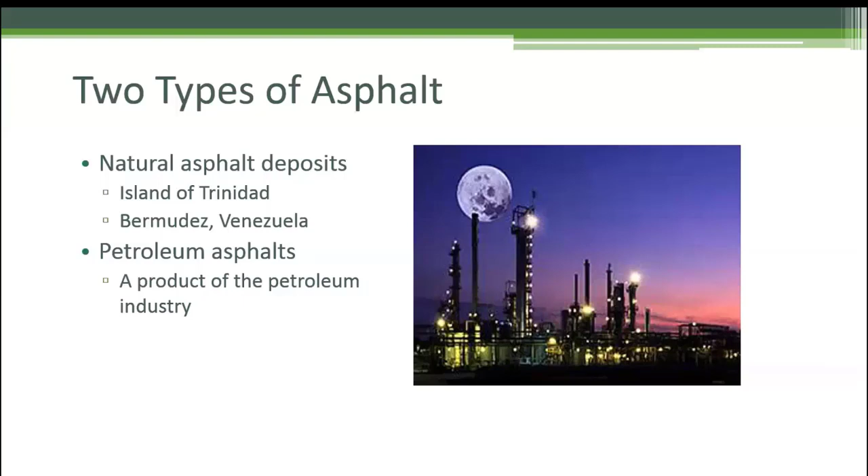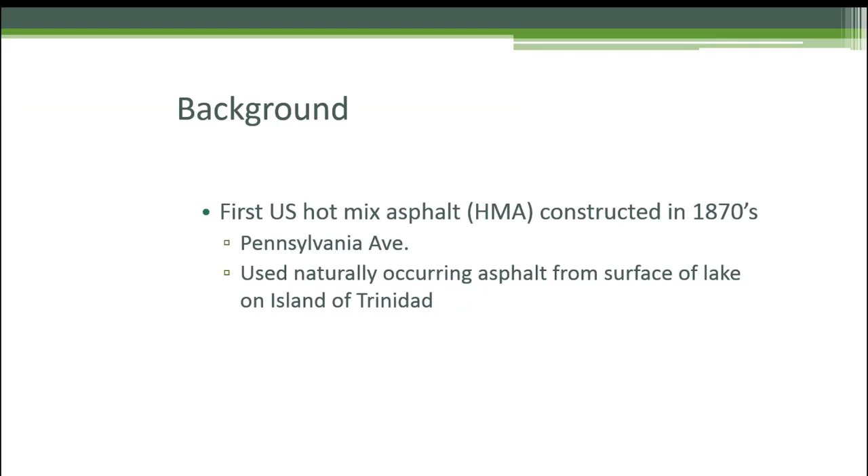As I mentioned, the first hot mix asphalts were constructed in the 1870s. Actually, Pennsylvania Avenue between the Capitol Building and the White House was one of the first paved roads, and they used these natural asphalts. This is in Trinidad.

This is a lake of asphalt, basically. I don't think you want to go walleye fishing there, but this is very high quality asphalt, obviously, for pretty low viscosity, low resistance, so easy to pump, and very accessible.

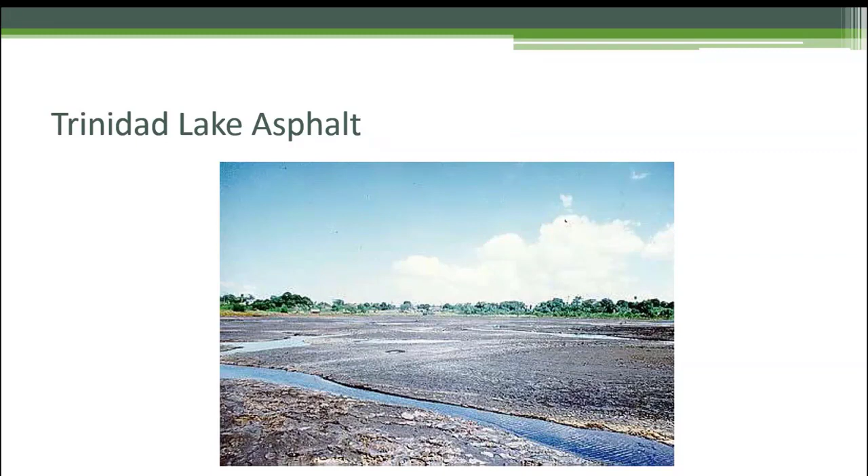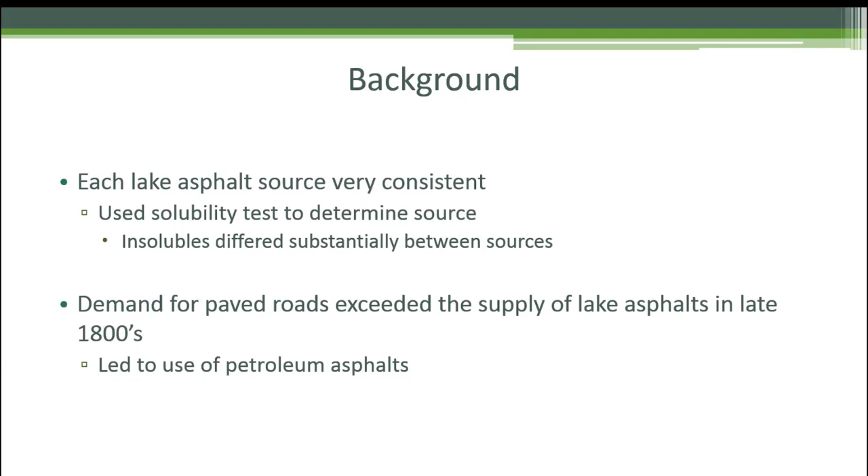Obviously, as the demand for roads increased, particularly through the late 1800s and the development of the automobile, primarily, the need for additional asphalt to build new roads increased dramatically. So we get into petroleum asphalts, and again, we're talking about refined crude oil, asphalt coming from the refined crude oil process.

And in general, the gases that come off the top, which would be methane, ethane, propane, those are easily collected. It doesn't take any temperature really to do that.

And they're collected and cleaned and stored and pumped out. And then next lower on the tower is the light distillates, which are typically your gasolines, kerosenes, and diesel fuels.

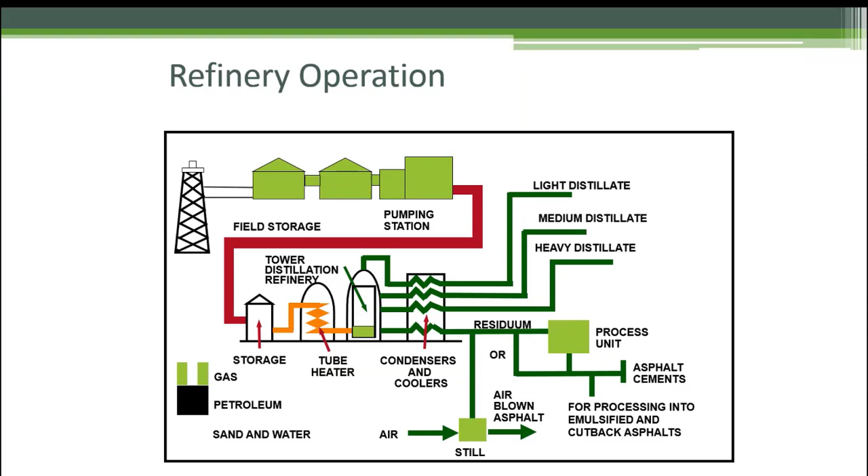So this is just the classic breakdown. This is actually in that black book I mentioned, the Hot Mix Asphalt Paving Handbook. It's also in MS-22, which is the Asphalt Institute reference material. It's just the distillation chart.

As you keep adding temperature to the crude oil, the first thing right off the bat are the gases, meaning the methane, ethane, propane, and so forth. Then the next thing as you're breaking it off, the light end product at lower breaking temperatures, are the gasolines—the naphthas, as it's called in the refining industry, because you refine the naphtha into gasoline, cleaning it up and adding additives to increase the octane. And then the next thing off is kerosene or jet fuel and diesel, and then gas oils or the fuel oils. And then the last thing left in the bottom of the drum is the asphalt residual, or the asphalt.

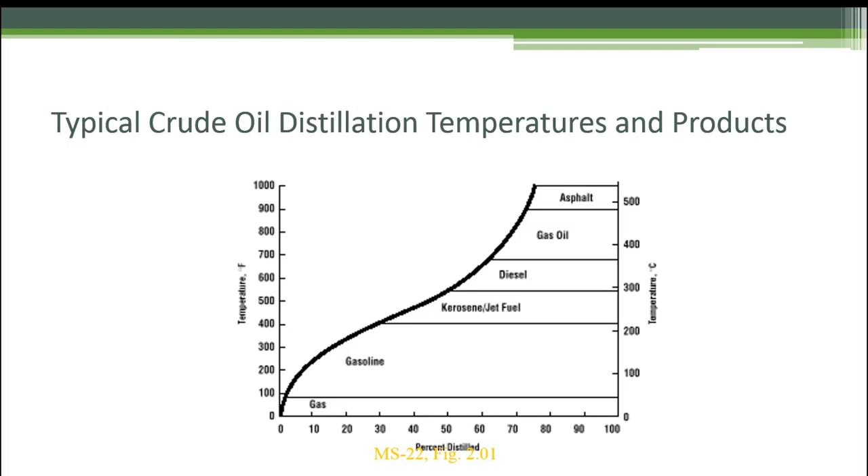Couple things to remember: asphalt's got some really unique properties. It's kind of interesting that the two products seen the most, the most basic ones, are probably the most complicated. One of those is water—water is one of the few products that expands when it freezes.

Asphalt's really interesting too, because it's actually a thermoplastic viscous material. In clean terms, at higher temperatures—70 degrees Fahrenheit going up to 200 degrees centigrade—it becomes a liquid. But as it cools off, it's a solid. So we call it a thermoplastic material because as it is heated, it becomes less viscous, meaning it flows a lot more easily, more like water. And as it cools off, it becomes a solid, semi-solid. It's an important thing to remember, both from the standpoint of processing and mixing, but even when compacting asphalt pavements, that property comes into play.

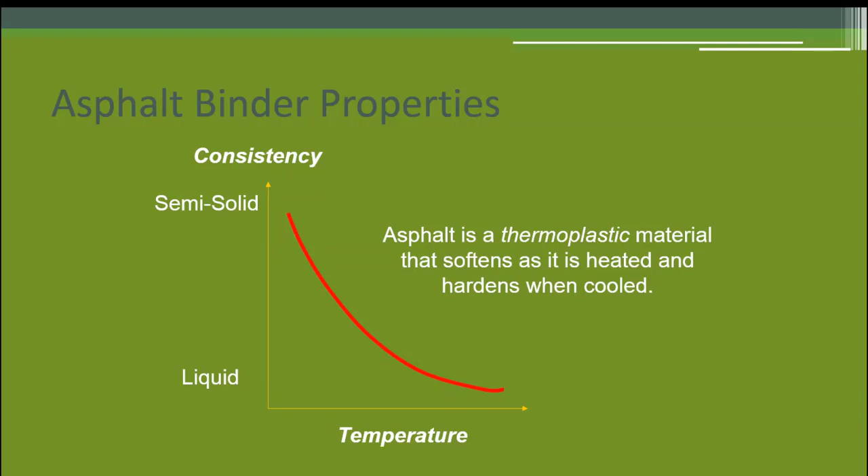The three basic delivery methods for asphalt itself are sometimes called neat asphalt, which is unmodified asphalt—straight from the refinery. It might be blended, but there's no other modifier put in. Or modified asphalt, where you put some type of modifier, whether it's SBR, SBS, styrene butadiene type products, polymer type products, or latex type products blended in with the asphalt. But those are basically the paving grade.

The other two methods of delivering asphalt in construction are cutback asphalts and emulsified asphalts, and we'll talk about that. The basic reason goes back to that thermoplastic property. Back in the 1920s, there weren't hot plants behind every tree across the Dakotas. So how did you pave a road? You had no way to heat up a paving grade asphalt to get the viscosity down so you could mix it with aggregate and get it hauled and placed. So you had to use another method to reduce that viscosity, and that's essentially what generated numbers 2 and 3 that we're going to talk about.

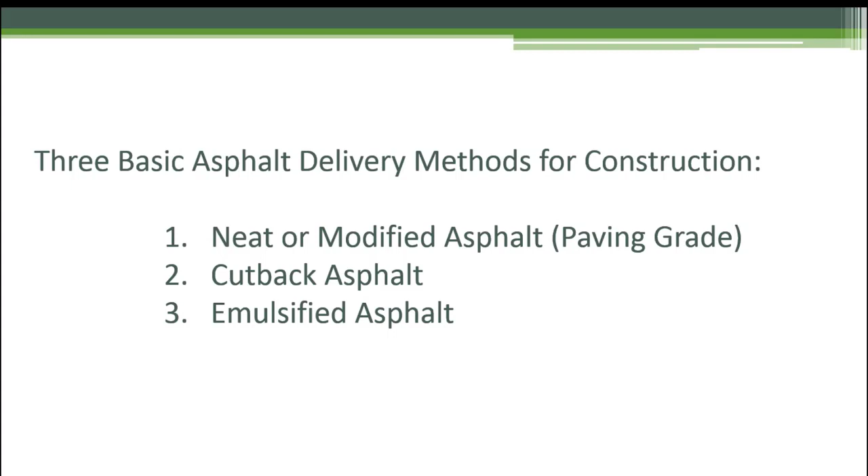Before we get into a lot of detail on that, I wanted to talk about the specifications. From the late 1800s on, you basically specified asphalt. You need some type of specification—get what you ask for, get what you measure. It was called penetration grading, sometimes shortened to pen graded.

It was a simple test. You essentially had this tin of asphalt at room temperature in a cup, and you put a weighted needle on it, and in 5 seconds determined how far that needle penetrated into the asphalt sample. So the number you get in penetration grading is actually a distance.

What's kind of interesting about this—because it's one of the older tests in AASHTO and ASTM—is why room temperature for penetration grading of asphalt? Well, you could test it any place across the United States. If you were in the middle of the Dakotas or middle of Wyoming and didn't have an oven to heat it up to a certain specified temperature, and even if you did, you didn't have a way of measuring that temperature. So it's kind of a room temperature test.

100 grams—that's fairly simple to weigh out, probably a postal scale will do that. And then the needle itself is a Sears sewing machine number 10 needle. You might ask, well, why that? Well, you could order it any place in the United States. If you had a catalog, you could order number 10 Sears sewing machine needles, and that was the basic conception of the penetration test. Now, of course, AASHTO took over, and if you try to buy one of these needles to run a pen test, it's going to cost you hundreds of bucks from a lab supply house. But basically that's the very simple beginnings, and at room temperature.

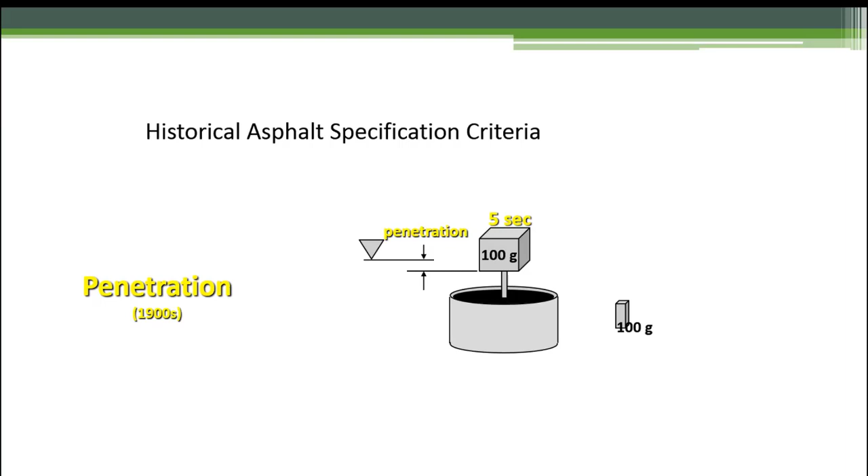So just a thing to remember, and we'll get at the reason for still retaining this pen graded idea: a lot of our older pavements, when we look at them for rehab, were built with an asphalt specification that was pen graded. 85 to 100 was kind of a standard pen graded asphalt cement that was used long before the PG binder specification.

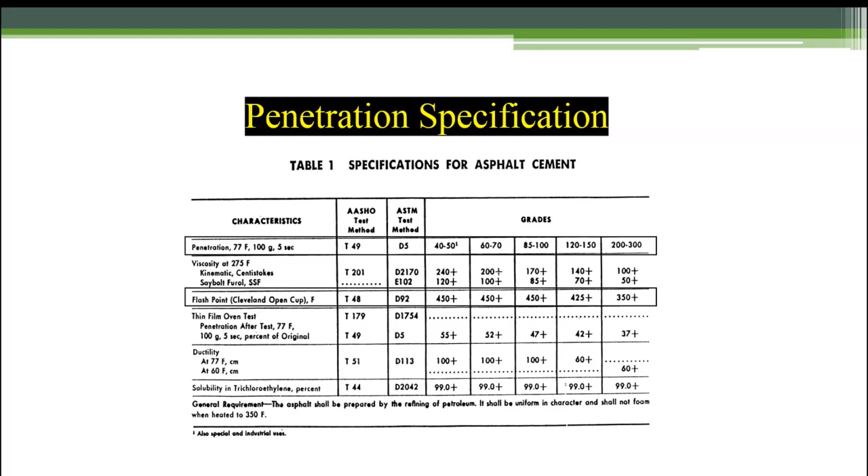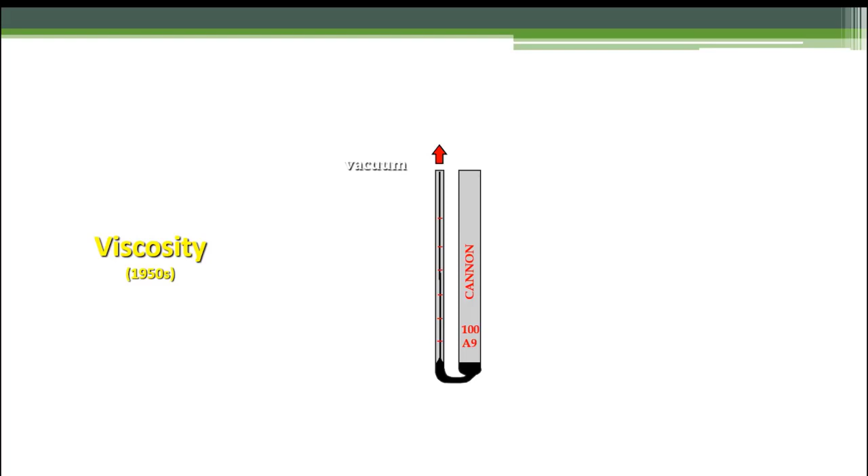Well, probably the middle of the summer, right? You get 5, 6, 7 real hot days in a row, or it doesn't cool off at night. You can get pavement temperatures up to 130, 140 degrees on the middle of the 5th or 6th day. And with asphalt, what we're dealing with essentially on one side is we don't want it to rut, we want it to be durable. If it's going to rut, typically it's because the asphalt's soft. So we're getting a test, a specification we can use to control a little bit of the stability side of the asphalt, the A in the 3 A's of our asphalt mix.

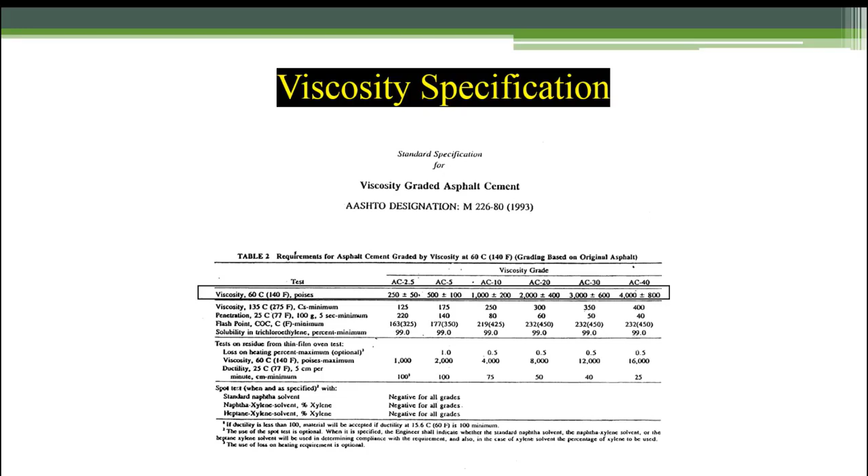Well, as I mentioned in the Dakotas, if you get east river in South Dakota, eastern North Dakota, a lot of the roads, my grandpa used to call them blacktops, right? County roads. And most of the state highways, if they've been there, the average age of asphalt roads in the Dakotas is almost 40 years. They get milled, they get overlaid and so forth, but that original pavement is not touched. And when the average age is 40 years, that means there's a lot of them that are older than that.

But if you get down far enough, particularly in the eastern parts of the state, you're probably going to find a road mix that was placed initially. Road mix meaning gravel was placed in windrow, asphalt was sprayed out, and then it was bladed back and forth and mixed, and then laid with a blade and rolled. I call it road mix. Some people call it cold mix, but basically the same thing.

Well, how do you do that when you have a thermoplastic material? You got to lower the viscosity. You got to get it to flow at ambient temperature, at room type temperatures. And how do you do that? You use cutback asphalts. All a cutback asphalt is, is that asphalt residual plus a solvent, some type of basically petroleum solvent. So you can think about it when you get to specifications as cutback's cure.

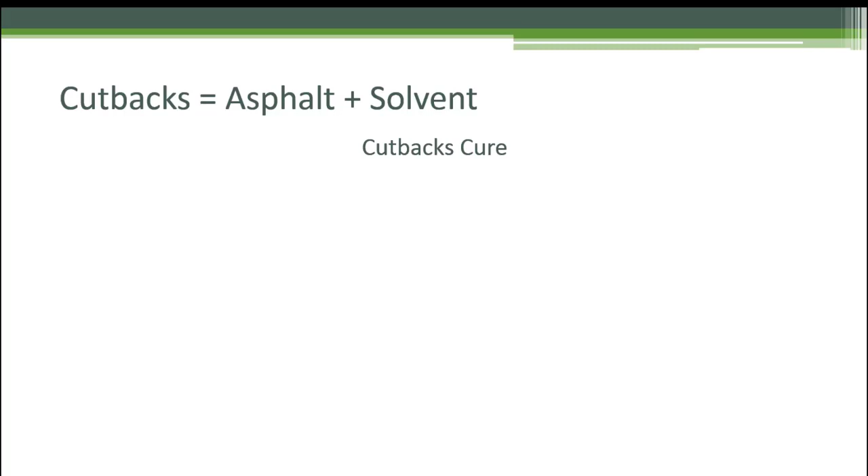What you're interested in is getting that residual asphalt in place. The solvent is just a way to deliver it. What happens to the solvent? It evaporates, leaving the residual asphalt in place. So you can think about it as cutback's cure. You'll see three basic specifications for cutbacks: RC, MC, and SC. So when you see a nomenclature, a prefix like that, you automatically know it's a cutback because of the C. Cutback's cure. It's kind of the cheat there, the hack.

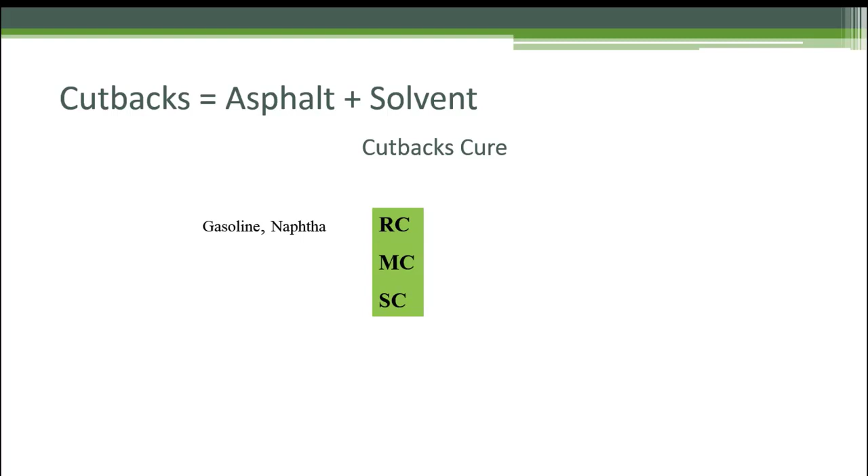So if we look at knowing that those are a combination of residual asphalt and solvent, in an RC, which is termed a rapid cure, the solvent is gasoline or naphtha. So it's that light end product. And MC, which we still use and see in our world, the solvent is diesel or kerosene.

So what do we typically use MC for? Prime, right? When you're building a new road and you have an aggregate base down and it's going to sit there for a while and you want to maintain profile and grade and keep it integral, you're going to shoot a prime. So we use MC, a medium cure cutback, to shoot the prime. We cover it up with a little bit of residual asphalt before we can pave it. And the classic smell, I mean, you can drive through it and get close, you know the prime's been shot because you can smell it. You can smell the diesel or kerosene evaporating off.

The RCs, the rapid cures, you see very rarely. Gasoline's an expensive product, retails at a much higher value. It's dangerous to shoot because of the low flash point, but it used to be used a lot for chip seals, and it made a great chip seal because the gasoline actually softens that asphalt surface that you're going to chip seal and penetrates. But expensive, dangerous, environmentally insensitive.

And then the last one is SC, slow cure, and the solvent in that is a bunker fuel or a fuel oil. That was used primarily for winter mixes. If I needed to put some mix up in a pile that I had to have over the winter, because if I have a water line break and I gotta dig everything out, but I gotta repave it, and I can't use gravel because it's frozen, and I want something hard surface so I'm not out there every morning after freezing, I'd have a pile of SC mix, and I could go in, and after I kind of got through the surface, the skin, I had mix underneath.

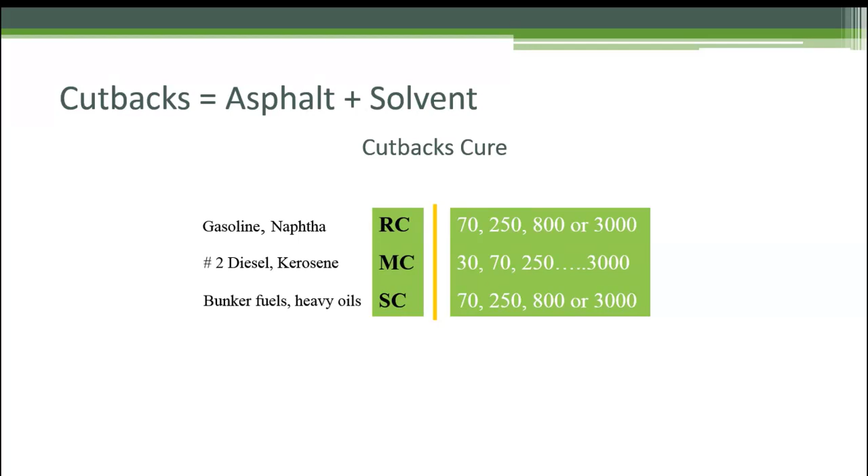So I'm going to throw up here the AASHTO specification for RC, or RC cutback liquid asphalts. Two or three things I wanted to point out here, boxed in, hopefully you can see that on your screen. Second line down is the flash point.

If you look at an RC 250, and as I mentioned, the cutter for an RC is gasoline, naphtha. Naphtha is just raw gasoline. What's the flash point? 80 degrees Fahrenheit. So in other words, if that product's out there and it's evaporating and exposed to an ignition source, boom.

There were a lot of times, and early on I didn't see it in person, but I've heard stories from valid sources, that the poor distributor person would get up in the morning early, go out, start heating up the tank to shoot RC. Next thing, if they're standing next to the truck, the damn thing explodes.

Why? Certain humidity conditions and vaporization. Once it's in the tank, it's going to start breaking. The solvent, in this case the gasoline naphtha, is going to start evaporating off, come out of the tank and circulate in and under the tank. Guess where you light the flames at? Under the tank on the distributor truck, and boom.

So that's the safety part of the issue with RCs. But the next box, about midway down, is volume of residue from distillation, in percent volume by difference. So as you look across there, you'll see RC70 is 55 plus, a 55 minimum. RC3000 is 80% minimum. Think of that, it says residue.

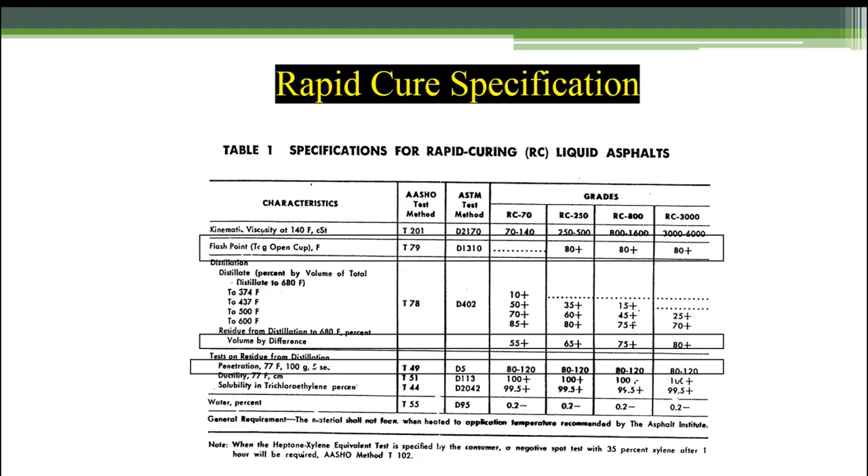If we go to MCs, you can kind of see this on the same line. Obviously our cutback, our solvent now, is diesel or kerosene or a combination of the two. So our flash point, again, lower viscosity on the left side, higher viscosity on the right side. Lower viscosity means it flows easy. Higher viscosity means it flows harder, or is more difficult to flow.

On an MC70, for example, the flash point's 100 plus, minimum 100 degrees Fahrenheit. So it still can be dangerous, right? It's the old diesel pump versus a gasoline pump at your local gas station.

Middle of summer, somebody spills gasoline on the tarmac, it evaporates off almost immediately. Diesel spill on the tarmac, guess what? You're stepping in it 3 days later, right? And get into your car and go, why do I smell diesel? Anyway, that's the difference.

You get up to the heavier viscosity products, again, less diesel, more asphalt, higher flash point. Then they run a distillation. You can see that, but the line down at the midpoint, again, one point to always look at is residue from distillation percent volume. So an MC30 only has roughly a minimum of 50% residual asphalt.

The other 50% is diesel. If you're shooting an MC250, you want enough solvent to draw that asphalt down in to protect your aggregate base, but you also have to understand the time component. It doesn't become residual asphalt until that diesel evaporates. And it's essentially 2/3 residual asphalt, 1/3 diesel for an MC250.

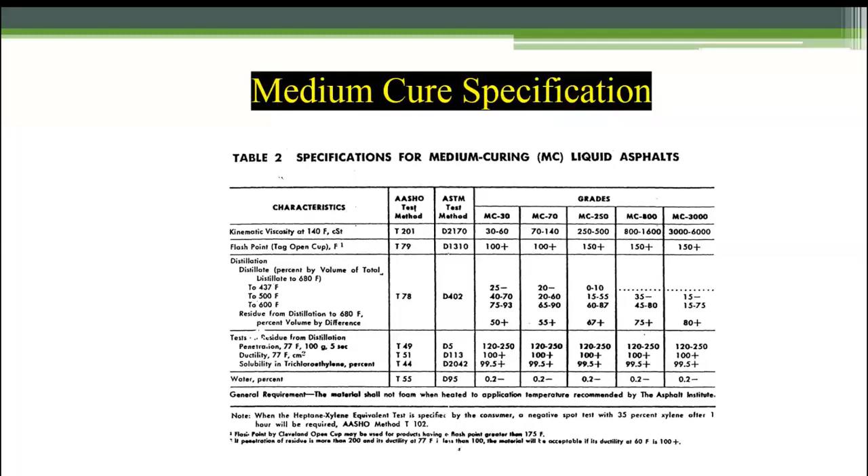Okay, just one last thing on cutbacks. So you have your basic primer here: the suffix numbers are the viscosity of the mixed product, and generally the higher the number, the higher the residual asphalt content, and obviously the stiffer the liquid.

But you can also have a suffix that's an alpha character, and that's the modifier mixed in with that residual asphalt: R for rubberized, L for latex, P for polymer, and so forth. For example, a lot of times the higher MCs, like MC-250 or MC-3000, are used in process-in-place or recycle-in-place type materials. You might see an MC-250P, meaning the residual asphalt is polymer modified.

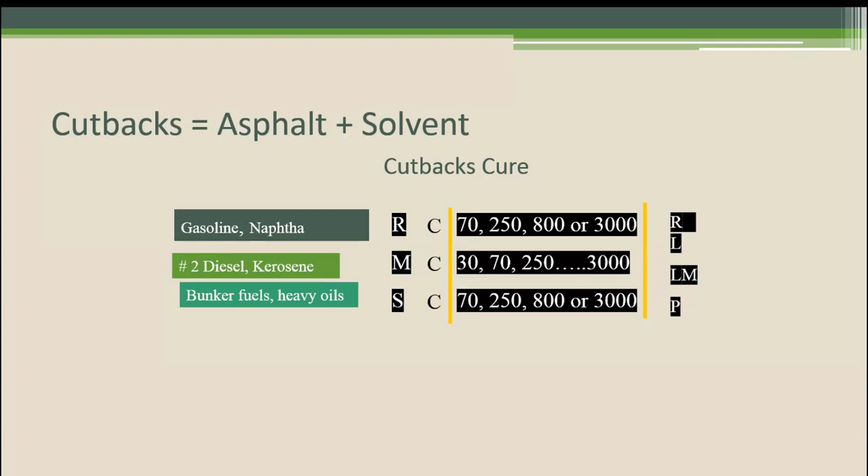Now, with solvents, the problem is you're spending a lot of money on that solvent, so the cost is typically higher just to deliver the residual asphalt to wherever you need it. Safety is another issue, especially with RCs and MCs, where the flash point can create its own safety concern. Then the third issue is environmental.

Obviously we've gone to a lot more controls. On the gas tank of your vehicle, there's a condensation collection system so gasoline vapor doesn't escape and go into the atmosphere. When you get into the Front Range of Colorado, the valleys of California, or the East Coast, they're under strict emission standards for particulate matter, and by law they do not allow the use of cutbacks in a lot of areas. So the transformation occurred to what are called emulsion or emulsified asphalts.

That's just a combination of asphalt, the residual asphalt, in water, with some type of emulsification agent. Why an emulsifier? Because oil and water don't mix, right? You've probably heard that saying for a long time, and they really don't mix. But if you put enough shear force in with some type of emulsification agent—think of it as a basic soap product—you can get the asphalt to suspend in the water. It doesn't mix with the water, it suspends in it. That's the basic mechanics behind an emulsion.

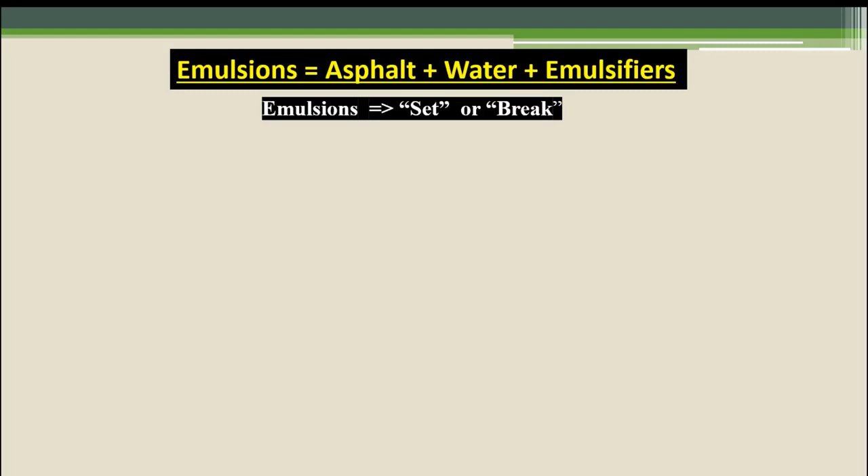So the hack here is to think of emulsions as setting or breaking. They don't become residual asphalt, which is what you want, until the water breaks off or the emulsion sets. From a specification standpoint, on a plan sheet materials and rates, you'll see an S, and if you see that S you automatically know it's an emulsion, because emulsions set. The prefix alpha indicates how fast: rapid set, medium set, slow set. There are times, uses, and functions for all three.

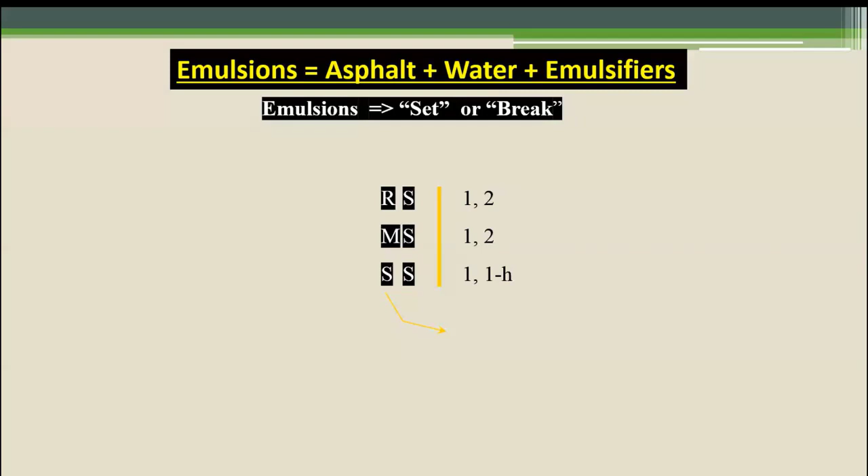Then the latter numeric is a viscosity range, and with emulsions it's pretty simple—basically two ranges. We'll get into the specification here in a second, and we'll talk about that 1H as well. The other thing is emulsions and emulsification agents: if you just see a 2-digit alpha prefix, the electrical charge is anionic, negative. If you see a third letter, a C in front of it, that means it's cationic, or plus. Think about the battery on your car—you have a plus, positive terminal, and a negative terminal. That's just the small electrical charge that's basically in that product, and there's a time and a use for both.

One thing to remember is in a lot of cases we're using emulsified asphalt on an aggregate, and aggregates in general have a small negative charge. So if you're shooting the asphalt onto that aggregate, generally you want a small cationic charge—opposites attract. Something to remember there. So again, if the letter C is in there, it's cationic, meaning it has a small positive charge.

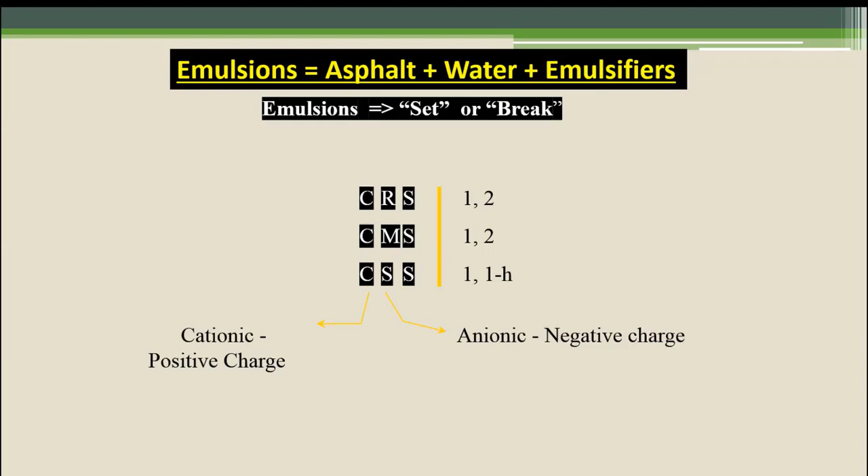Guess what? We need to increase that shot rate to get that target of residual asphalt on the road. Important thing to remember for tack coat.

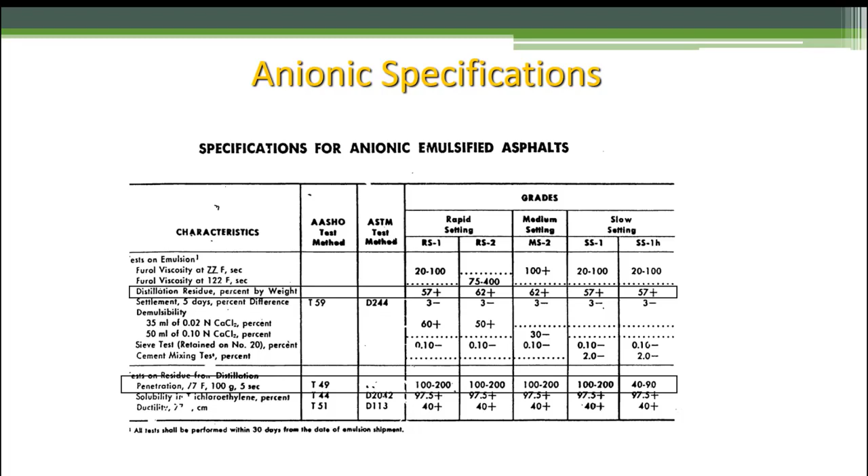Same basic premise here. The CSS1H has a 40 to 90 penetration residual asphalt. What does the CSS give you? A slight positive charge. So if you're on a project having problems with tack breaking uniformly, in other words water coming out, a lot of times just switch to a CSS. Since most aggregate has a light negative charge and you're shooting a positive charge with CSS1H, your problem goes away because opposites attract and you'll get a more uniform break.

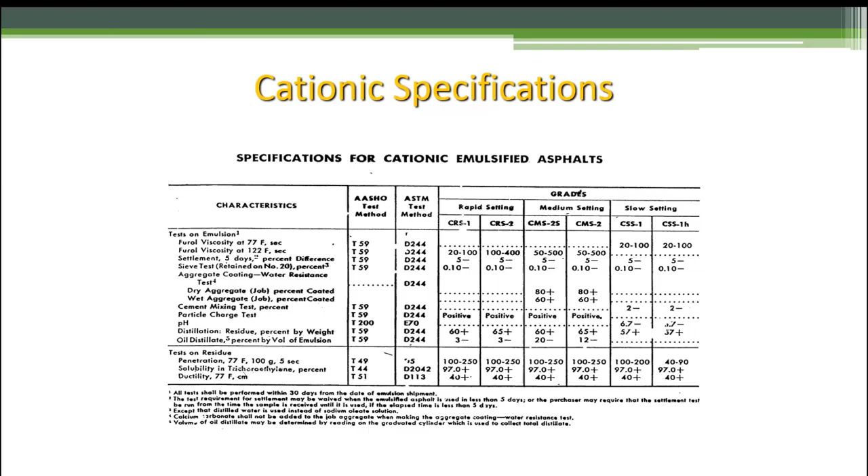So, Shay or Sharon, any questions at this point coming through? Does asphalt paving have advantages or disadvantages compared to Portland concrete paving?

I say advantages because it's kind of interesting in the pavement design world, they don't call it asphalt, they don't call it concrete. They call it flexible pavement versus, I'm not even going to say the other one. The thing about asphalt is it's so flexible. From a pavement preservation standpoint, from a pavement rehabilitation standpoint, basically all the numbers show it's much cheaper, much more economical to place asphalt pavements. I mean, 97% of the pavements across the United States are asphalt.

And I understand, I've built concrete pavements. By the way, rigid is what they're called in the pavement design world. I built them, designed concrete mixes, tested them. It's a matter of cost and constructability, and more constructability is the big issue, is time to construct. Asphalt roads can be maintained and built under traffic. We do it all the time, right? Two-lane roads, head-to-head traffic during the day with a pilot car.

You very rarely close roads. The other thing is very rarely are asphalt roads reconstructed. As I mentioned, the average age is approaching 40 years. So yeah, they're added to, they're overlaid, they're milled and filled, but they're still there. The other thing is the value of asphalt is retained forever. Most of it's almost like a certificate of deposit that we have in both states.

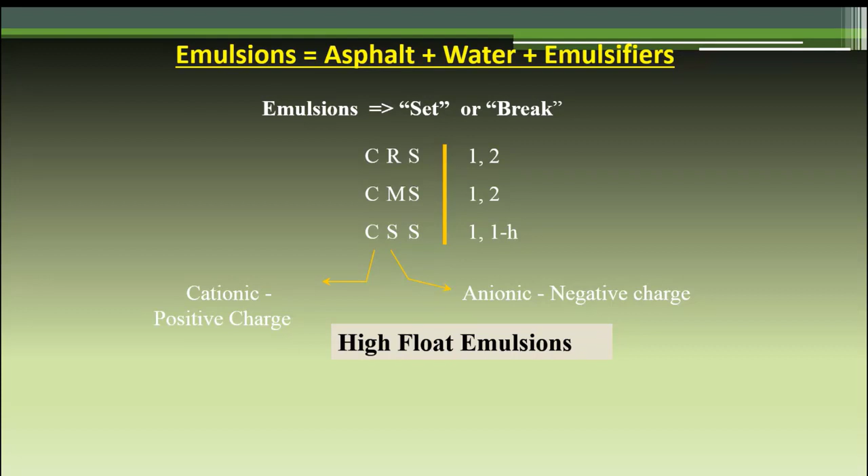High floats were kind of designed to be a little more dust tolerant, but more and more states have moved to better specifications, better designs for chip seals. The amount of high floats have gone away, but there's still a use for them out there.

And then, as you see there, high float medium set, high float rapid set. You can also see an alpha suffix, and again that's the modification of the residual asphalt - rubberized, polymer, latex modified. So as I mentioned, for chip seals across the Dakotas, a lot of times you'll see a CRS, cationic rapid set, 2, viscosity range 2, P, polymer modified, CRS2P.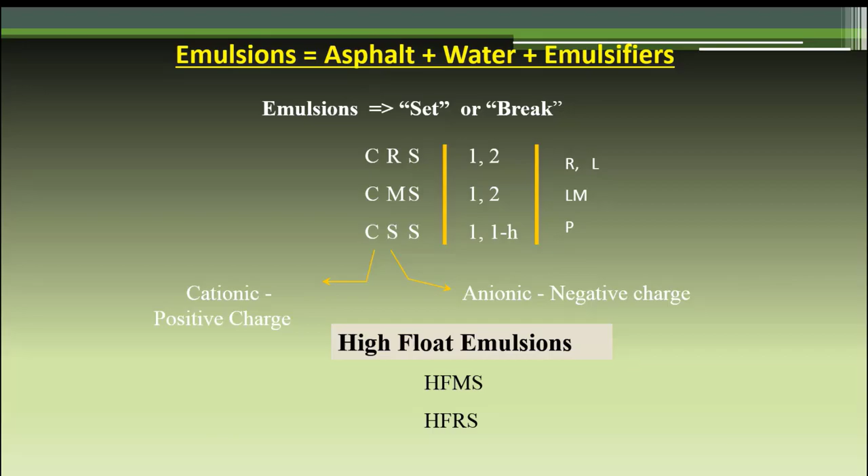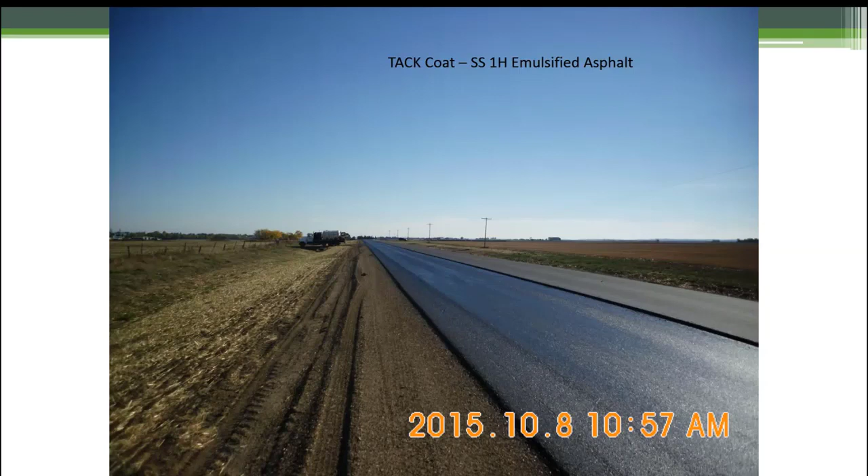But it turns from brown to black. The cure test for a tack coat is it's got to weld the two layers, so you need the residual asphalt on the road. And that's why I wear my old boots when I'm out on jobs like this - because I step in it. If I don't get some crawling asphalt up the soles of those boots, there ain't enough tack there.

Okay, kind of finishing off this on the asphalt side and then leaving a little time for questions, we need to get into the paving grade asphalts. So we talked about penetration grade, shortened to pen here, and viscosity graded, VIS here.

So if you remember, our penetration test is run at 77 degrees Fahrenheit, which is 25 degrees centigrade. So if we had spec'd a pen graded asphalt meeting a certain range, 85 to 100 say, both A and C in this diagram would meet the requirement of our specification, right? But same traffic, same roadway - what happens to those two asphalts as they get those extremely cold winter temperatures?

C is going to crack quicker, right? Because its cold temperature properties are much more brittle. A is much softer, even though they grade and spec the same for pen grade. So you can build the same road, same spec, same thickness, everything the same, and everything meets specification. But I'm sure hoping that I got an A asphalt and not a C asphalt from this chart when I get to cold temperature cracking.

Conversely though, when it gets extremely hot in the summer, right? We run the viscosity at 60 degrees and kinematic at 135 degrees centigrade. So that's 270 and 140 basically. If I just use viscosity to grade it and specify it, I've got B and C, right? They meet the same viscosity specification requirement.

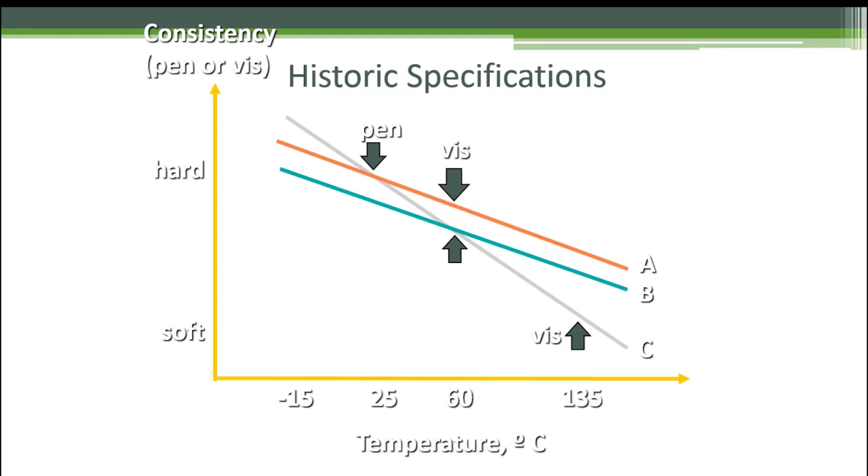So with a combination of PG binder, Superpave, and better control of the mix, better design of the mix, we can get both. And that was kind of the initiative of PG binders, performance graded binders. Depending on which spec we used, it was a single point measure. Unfortunately, in both of those, none of them measured a low temperature property, which can be the biggest killer of pavements in the Dakotas, right?

It's just that one extremely low temperature, and that one season, that's a bad winter. And then we got into more modified asphalts.

The viscosity system and pen system don't handle or characterize modified asphalts well. I was in the lab in Cheyenne at the time, and it seemed like every week there were three new snake oil salesmen. Put this in, carbon black, sulfur extended, everything you can think of, including polymer, some of which we use now. So states started writing different specs because they had tested and tried different modifiers. Now you had suppliers trying to figure out which state they were sending stuff to and which specs they were trying to meet. The other thing is because asphalt's a thermoplastic, viscoelastic material, it changes properties with age.

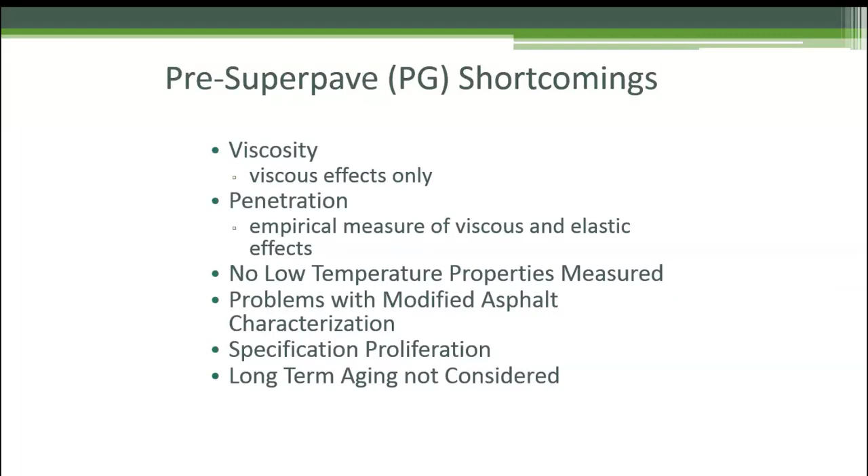So again, the basic asphalt binder specification is laid out here. It's a grading system based on climate and traffic loading. The PG designates that it meets the performance graded binder spec. This one, South Dakota, uses what's commonly termed PG plus, the AASHTO spec, and I'll get to that in a second. The first number there is actually the average 7-day maximum pavement design temperature. So based on where you're at, its climate, and the traffic loading, that's a temperature in degrees Celsius. So I know, okay, I need 58 degrees Celsius to keep my stability and resist rutting.

The second number, that's not a hyphen, that's a negative number. It's negative 28 degrees C. That's the minimum air or pavement design temp. And when I say air or pavement, the most susceptible part of the pavement to thermal cracking is right at the interface between the top of the pavement and the air. It's that cold, cold, cold January morning right before sunrise or right after sunrise. The cracking starts from the top and works down, because that's the maximum stress of that pavement trying to contract. So that's the basic system: 58, average 7-day maximum pavement; minus 28, low pavement.

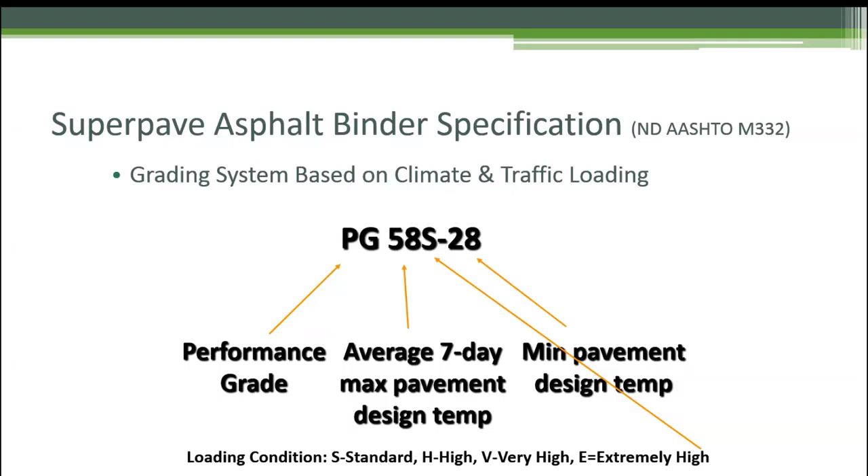North Dakota has a little bit of a twist on this, as do some other states. They use what's called AASHTO M332, also called the MSCR system. Same basic layout, PG for performance grade. First number is the average 7-day maximum pavement temperature. Second number is a negative pavement temperature, and these again are in degrees centigrade or Celsius. But they add this suffix after the high temp number, and it'll be an S, H, V, or E. That designates the loading condition. S is standard, H is high, V is very high, E is extremely high, and I'll get to that in a second.

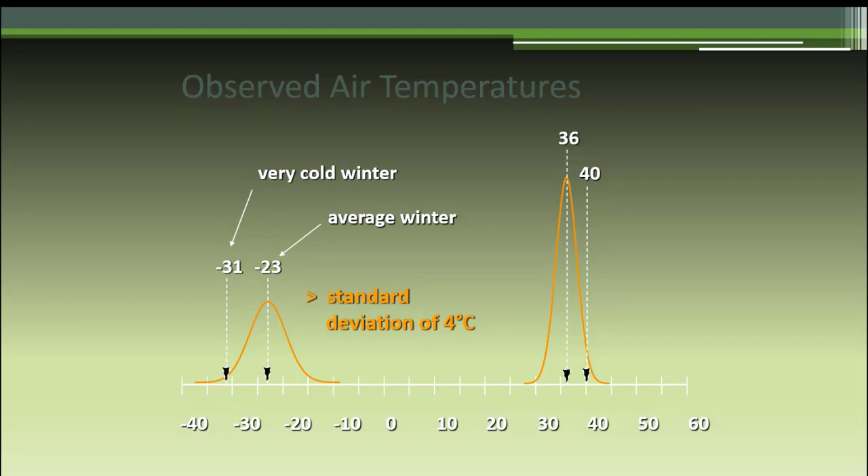So what are we looking at? We can go in and I'll show you the output page here in a second. For any pavement, any location, we can calculate through the algorithm what this highest 7-day average is, and we can do it on a probability basis. You see a standard bell curve on the low temperature side and on the high temperature side. How reliable do we want it to be? Nature changes, is variable, we get variability. If we want to be extremely conservative, we use the very outer edges. If we want to be relatively standard, we use the middle of those two normal curves or bell curves. That's kind of the layout of what this algorithm does. Again, these are pavement temperatures, going off the actual algorithm, and I'll show you the software that does that. Depending on where we're at and the time of year and so forth, it'll run that number for us so that we get both the low pavement temperature and the high 7-day average pavement temperature.

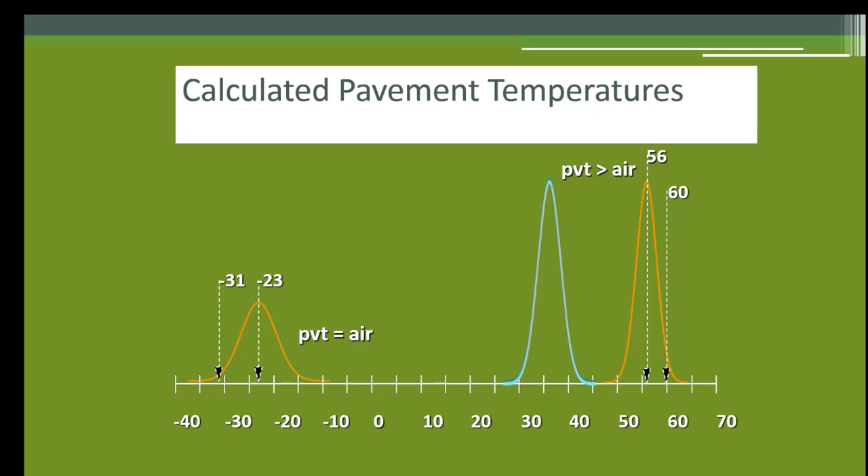The very extreme outsides give us the most reliability. This is an AASHTO concept for pavement design as well as maintenance. It is this reliability concept. So if we're on a high volume road with a lot of traffic, we want very high reliability.

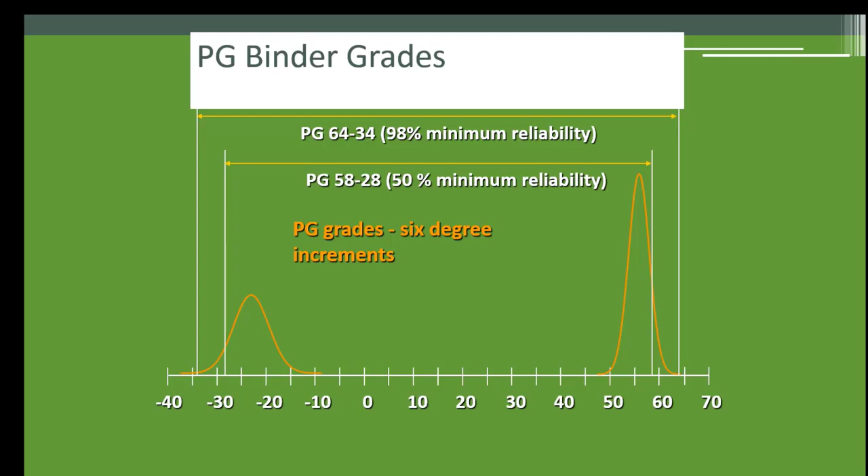The other thing we have to bring into play here with asphalt is, because it is a viscoelastic material, the flow behavior and the rate of flow. That'll tell us which grades we go to as well.

A constant force, I call it the Harley kickstand of impact. Middle of the summer, somebody's got this $25,000, $30,000 Harley, and they go in to eat lunch and put the kickstand on. You got all that load on a real small footprint. If it stays like that for an hour, somebody comes out and sees their $30,000 Harley laying on its side and starts looking for who did it. That's this kind of rate of loading behavior. And that's why you see a lot of stability problems first occur in an area of starting and stopping, whether that's a stop sign or a signal light.

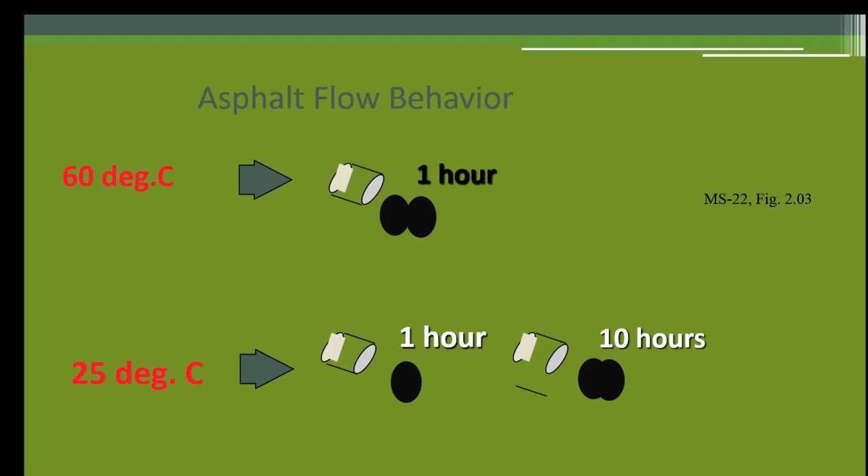The original PG binder protocol was that if I had extremely high truck traffic out of my total ADT, average daily traffic, a large percentage was truck traffic, I would do what's called a grade bump. I'd take that 58C, for example, and bump it up to a 64. The PG grades work in 6-degree increments, so you go 58, 64, 70 on the high temperature side, minus 22, minus 28, minus 34 basically for our part of the world on the low temperature side. If you had an area with extremely high loading, like a start and stop, you would bump it again, so now your 58 became a 70. That was the way you compensated to account for those pavement characteristics and loadings.

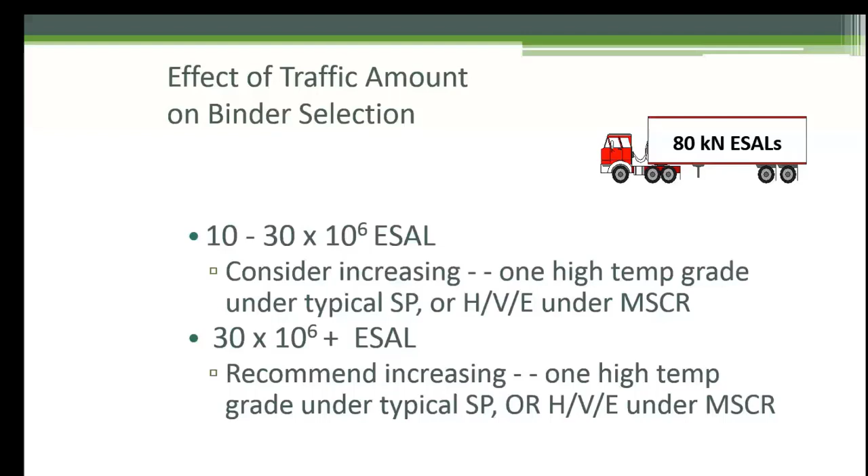But we don't get pavements that reach 70 degrees centigrade in our part of the world, so essentially we're trying to fool the system. What came out of that was this MSCR method, multiple stress creep recovery. I'll get into that in a second.

Basically what PG Binder did as a specification, as a testing method, is try to accommodate the asphalt liquid under all conditions. Far left is the extremely cold pavement temperature, where the pavement tries to contract, maximizing stresses, which at some point, if it doesn't take traffic, the pavement will snap - a transverse crack on a roadway, maybe 50 to 200 foot spacings. The next step to the right was a test looking at normal operating pavement conditions - we want to assure that. Third to the right is what happens at extremely high pavement temperature in the summer. Far to the right is what about when we're pumping and storing that, running it through a drum with the burner blowing hot superheated dry aggregate through it. So it accommodated all of those conditions.

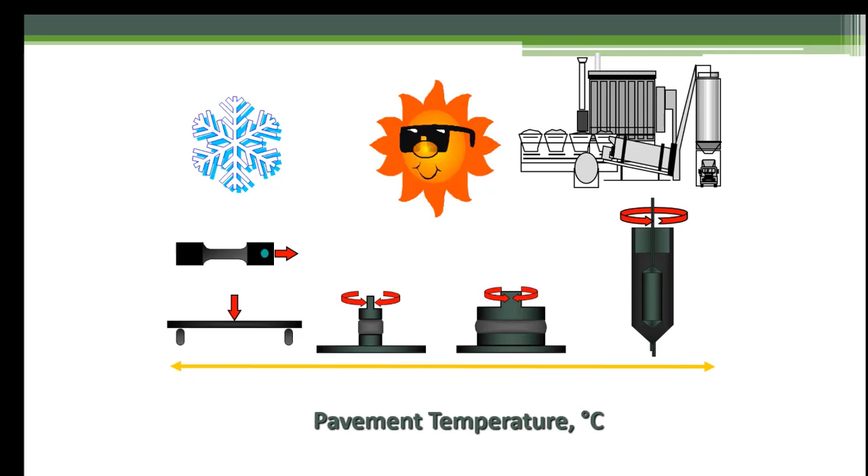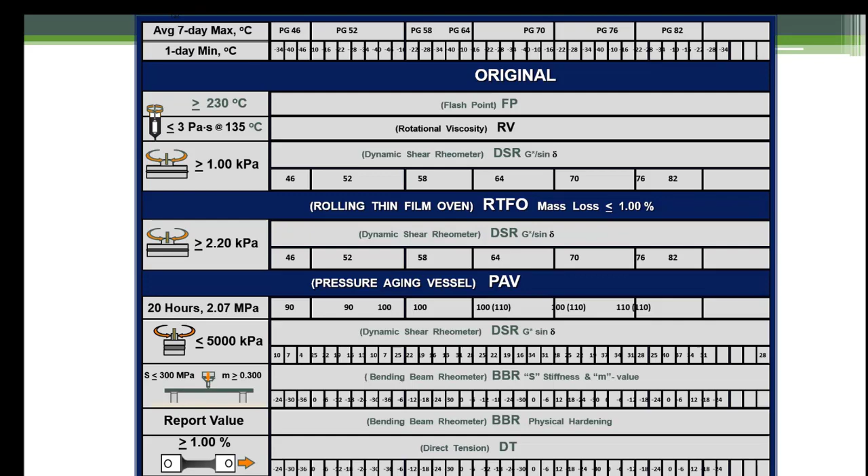This is just the layout - you don't have to memorize this. It's the range of testing based on PG grade. You still have the flash point, but you're using rotational viscosity, and then DSR was the big one, dynamic shear rheometer. It's a G star over sine delta test, but we do that both for the initial, original asphalt, and also artificially age it and test it again, and it has to meet those specifications. So we account for that aging property as well.

So I mentioned modified binders - how do we get there? Well, rule of thumb: if you add those two numbers together, the absolute value of those two numbers, and they're getting around 90, particularly if they're very far above 90, neat asphalt has to be modified with some type of modifier to get that temperature range. So when you start seeing a pretty big range between that high temperature and low temperature number, you probably have a modified asphalt.

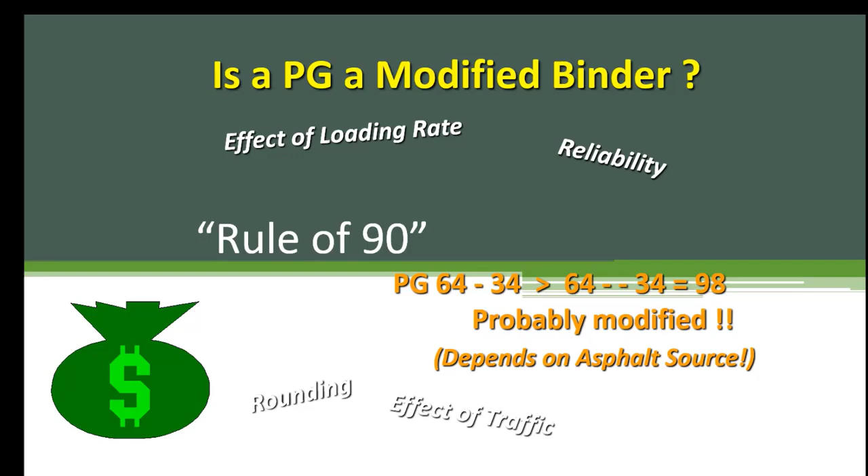So how do we pick it? Based on climate, roadway, and traffic loading, we use what's called, and write this down everybody, LTPP Bind. If you Google that, you can get to software through the Federal Highway Administration webpage, Turner-Fairbank, and it's free shareware - you'll see it here in a second. But North Dakota uses what's called the PG MSCR specification, to use the slang, multiple stress creep recovery test. South Dakota uses what's called PG Plus, which is essentially the PG specification as well as specification controls on the modification or modifier utilized in the neat asphalt.

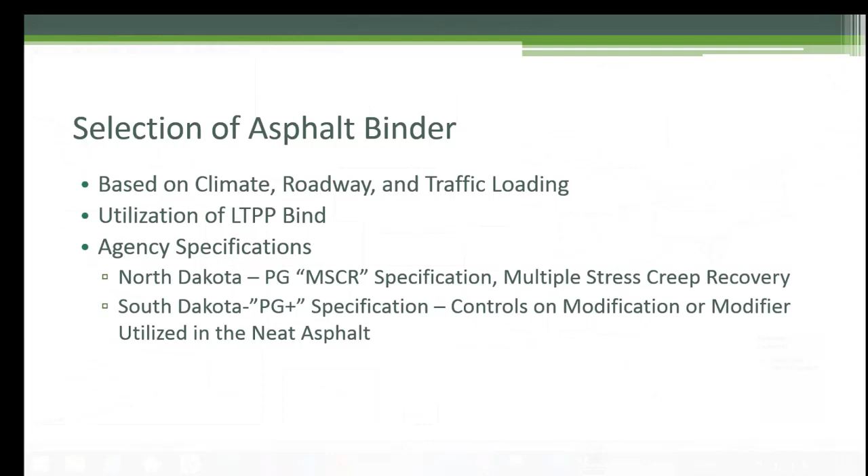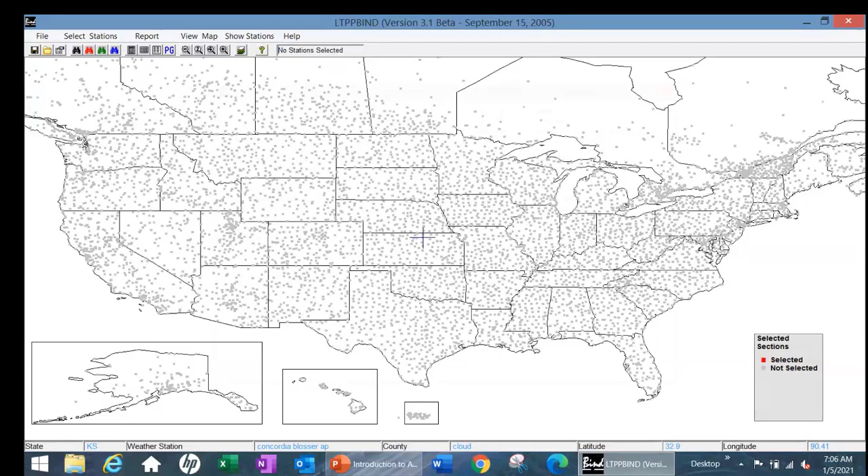And you just put your target on wherever you're at. In this case, I picked a spot right at the border, near Eureka, South Dakota, McPherson County, just east of the Missouri River.

And it'll give you the 5 closest weather stations, and you can see them listed there. For those 5 stations, it gives you the average and deviation of the high and low temperature, also the temperature drop, how fast the temperature drops. And for those of you still using concrete, strictly in structural concrete for bridges, it gives you degree days too.

But the bottom third of that is what we're looking for. It gives us, for that particular area, in this case Eureka, South Dakota, what's okay for its temperature and climatic conditions. The algorithm will rate me out at 52.7 to minus 25.4, which means for 50% reliability, I should be using a 58 minus 28 oil.

And if I want to bump it up, essentially it's the low temperature side, which makes sense, right? Eureka is 58 minus 34. The numbers in parentheses are the actual reliability of that particular temperature for that particular area. So for the 50% reliability, the 58 minus 28, the low temperature number is only 79% reliable. That's why you see the bump to minus 34 in cold temperatures.

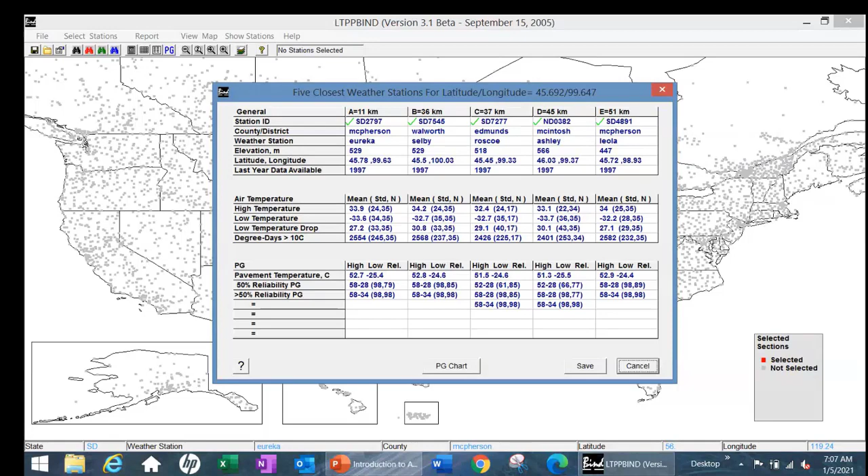So that's the one output you get from it. You can also get specific. We talked about rate of loading.

The other thing, cold temperature effects drop with depth into the pavement, right? If I'm doing 2 or 3 2-inch lifts, I don't need the minus 34 in the bottom 2 lifts, because the lower I go in that pavement structure, the closer I get to what temperature? 0 degrees centigrade, the frost line, 32 degrees Fahrenheit. So I can go in, based upon reliability, high traffic versus low traffic road, depth, and rate of loading, fast versus slow, and compensate this to come up with a fairly accurate PG binder grade selection.

In this particular instance, it was 58 minus 28. You can do this for any place. This is really good if you're a consultant on the DOT design or making recommendations. I urge you to take a look at this program. It's a free download, LTPPBind. It's got a lot of other good information as well, you can map out the PG grade categories across the state.

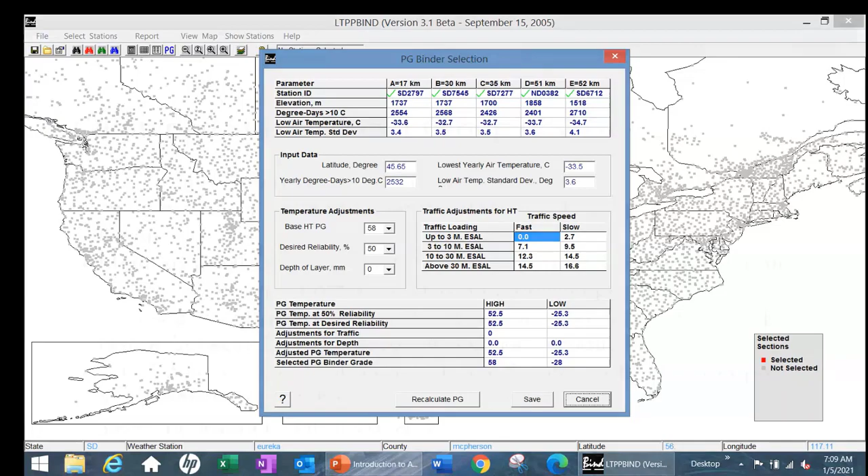So just wanted to bring that up. Last thing was, both states are members of what's called the Combined States Binder Group, a group of states including those listed there. What it does is combine, from the asphalt production side, the QA element with the producer or refiner, and these states have agreed upon a common quality assurance and testing procedure, and they do round robin testing between the state highway agencies.

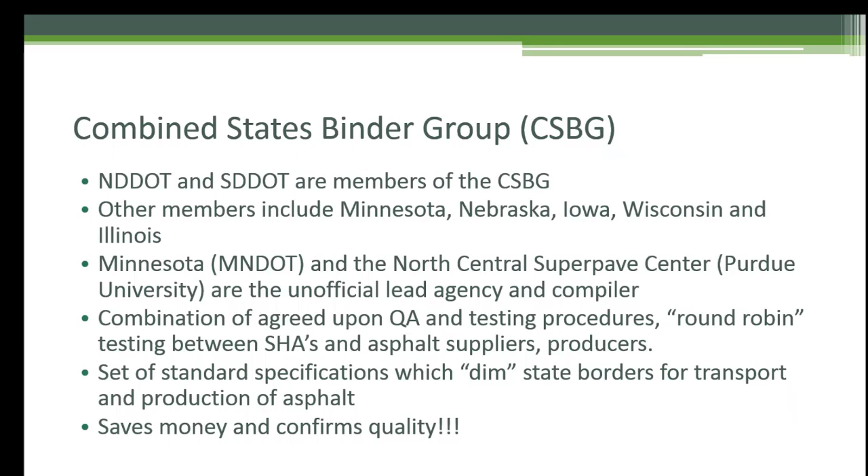And the idea behind this is to marry cost and flexibility. In other words, if you order a 58 minus 28 in Minnesota, it's the same as South Dakota, it's the same as North Dakota, which saves money. So this is just the basic background on it.

I would urge counties and cities to evaluate this. When this first came out, I was working up and down the eastern corridor, the Big Sioux River and the Red River in the Dakotas, saying, if you look at those numbers for city streets or counties, a minus 34, if you want reliability to keep away from cold temperature cracking, you should be building with minus 34 on your cold temperature end, because those areas tend to be the coldest part of the state. You get up to the northern border and the North Dakota Canadian border, it's the same way, and you can look at it on that map.

But the one thing for states, counties, consultants is when you spec a job, you can refer to the DOT standard specifications. Well, that's good. With it, it's going to carry the specification requirement. In South Dakota, that's PG plus, and in North Dakota, that's PG MSCR or AASHTO 332.

But you also have to spec a grade. You can't just refer to the standard specification book on your project without putting a PG binder grade into your plans and specs, because that's not in the spec book, that's in the plans, and that's how the DOT does it. And if you don't spec it, you're going to get whatever's cheapest on the market, and that's not what you want for your road.